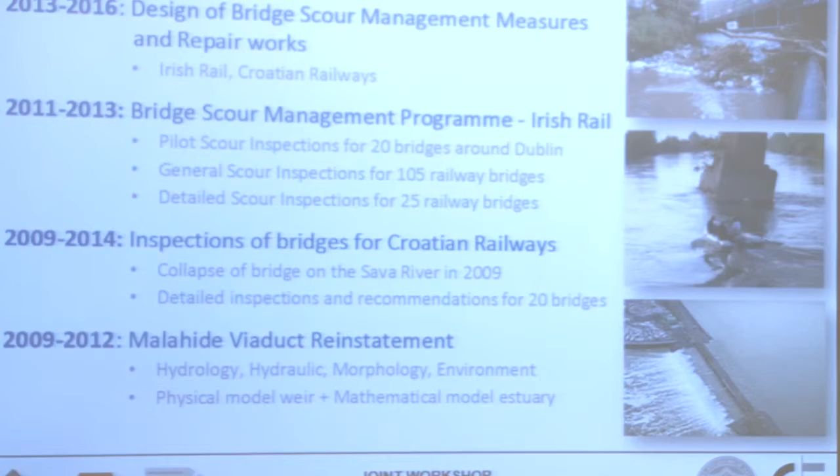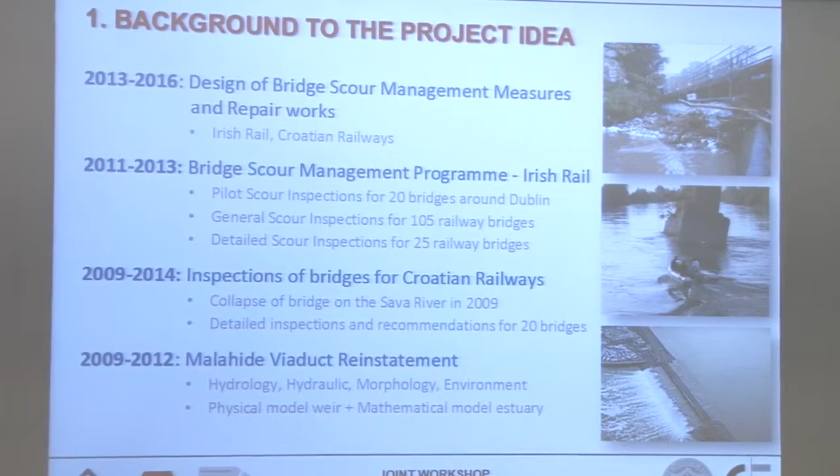I would start with the background of how the project idea evolved. As partners, we were actively involved in the rehabilitation of Malahide Viaduct, which collapsed in 2009. We analyzed past events and were involved in the investigation and design of that weir. We were also involved in assessing the causes of the failure of the Sava Bridge, which I wasn't able to join you for yesterday, but we were actively involved in that project as well.

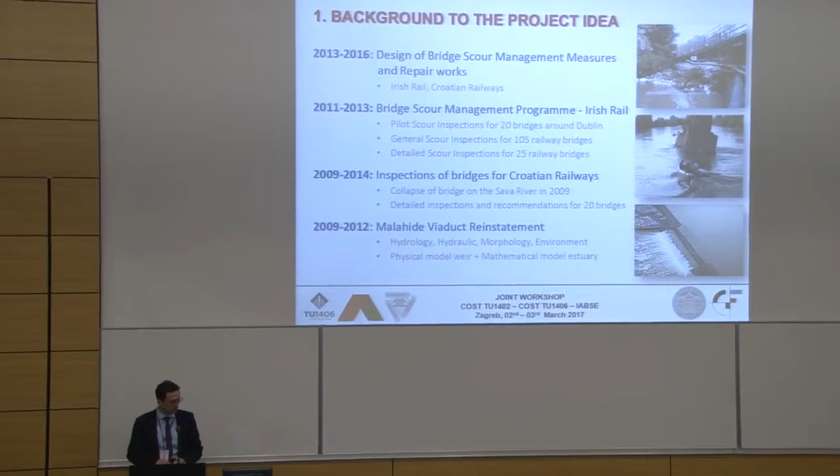Further to that, we were involved in assessing scour risk across Ireland for more than 100 bridges, and also in design studies of scour protection in Croatia and Ireland, etc.

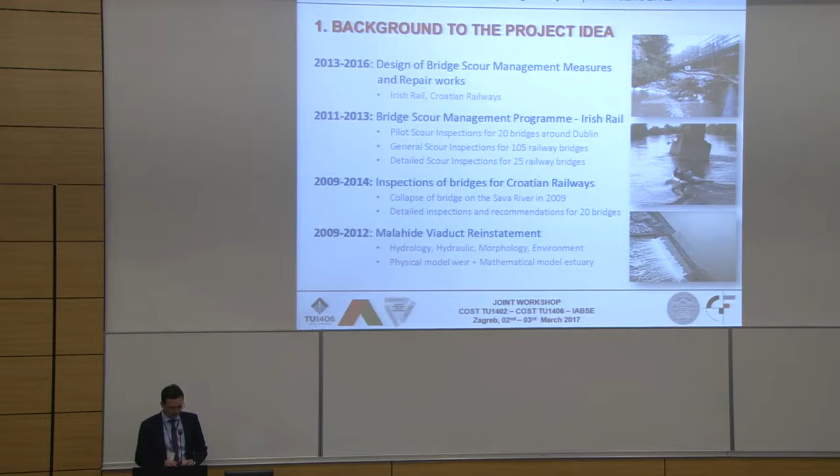As my previous presenter also pointed out, scour is a main cause of bridge failure. From a study in 2007, which is well known, if we look at the number of bridges and causes of bridge failure, we can see that 58% of failures are due to hydraulic effects, which is actually scour.

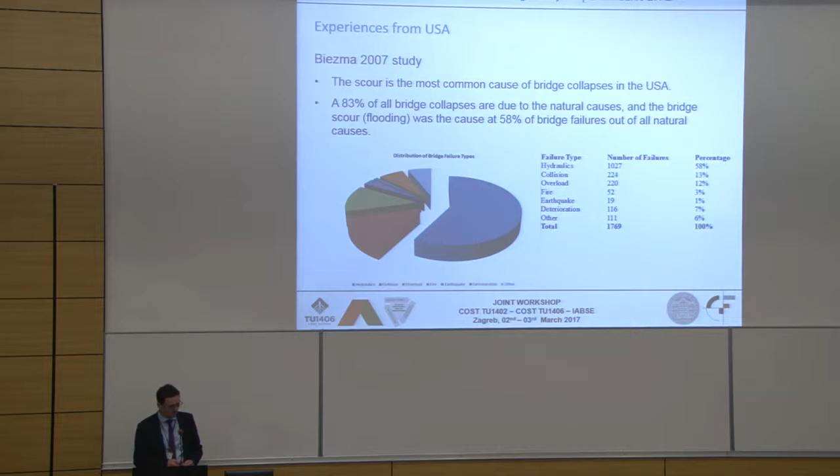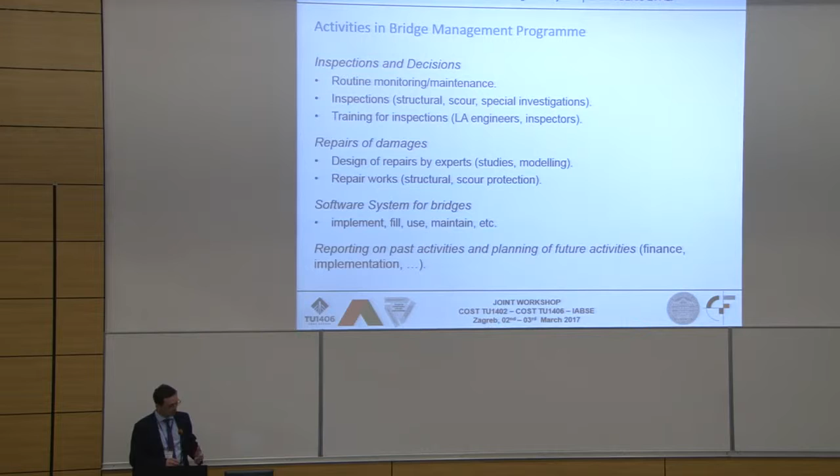When we looked at the entire process of how the activities of a bridge management system work for the end user, we need to consider inspections and decisions, meaning routine monitoring and inspections of bridges, and also training. Then there is repair of damages, either hydraulic or structural, and a software system which combines all the data. There's also reporting of past activities and assessment of future activities.

So from the end user point of view, there are always limited budgets and limited time available to collect and process all this data. Decisions must be made about how and where those limited resources should be invested, and where investment is not justified on the other hand.

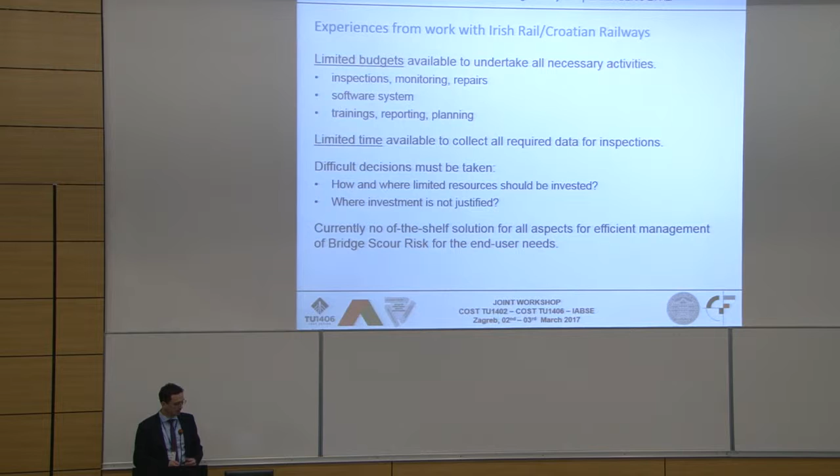When we looked at the various possibilities available on the market, we said, okay, we need to look at this from scratch, from the beginning. This is how the idea ended up with a cost-effective solution focused mainly on scour risk, which is what I'll point out today, but we broadened it up also to the structural aspect of bridge safety.

In general, Bridge SMS is an IAPP project under the FP7 IAPP program. Its duration is 4 years, from 2015 to 2018, and the budget is 1.4 million euros. The partners are two research institutions, University College Cork and the Faculty of Civil Engineering from Zagreb, two industry partners, Cork County Council from Ireland and Infrastructure Portugal, and a software company from Zagreb, Artis.

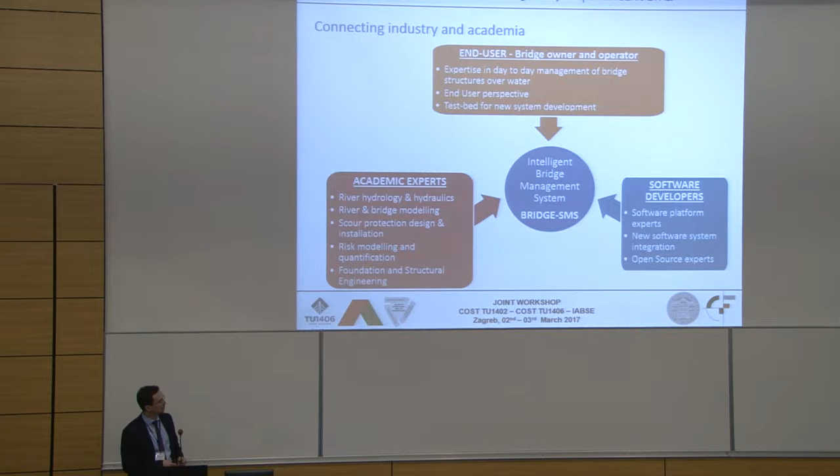We also have a supporting institution, University of Lincoln, and two institutions from Ireland. Looking at how this interconnects, from the entire project we have the end user perspective, so we get information on their needs, what their daily work is, and how they look at this inspection system, because they're not dealing only with bridges, but also roads and other infrastructure assets. Then we have academic expertise from universities, and software developers who help develop the entire system. All of this is jointly interconnected in the project.

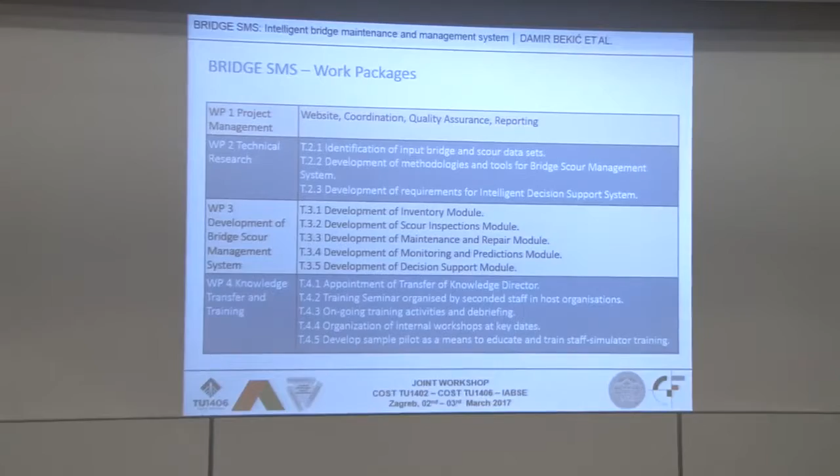If we quickly look at the work packages, the first is more general project management. What I'd like to point out today are a few elements of the technical research, which goes to identification of input bridge and scour data sets. The data is the most valuable thing, and how we process, collect, store, and use the data is one of the big elements of our idea and of this project.

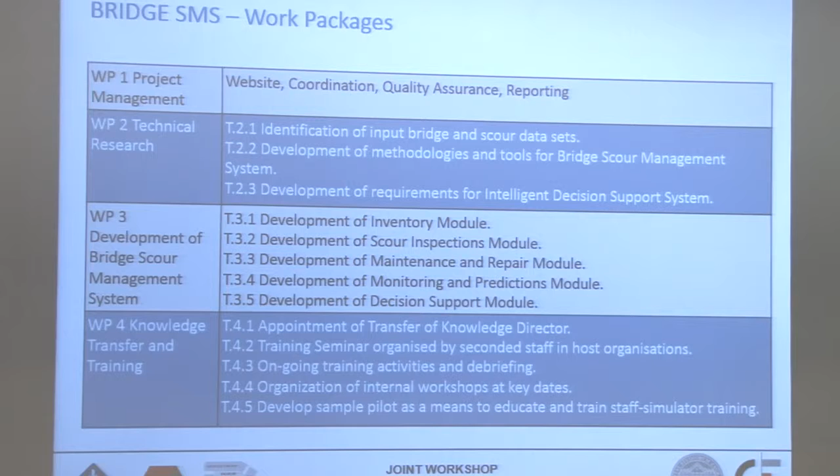Work package 3 is the development of different modules, so we are looking at developing this as a modular system. In the end, there is knowledge transfer and training involved in this project, because this is part of the Marie Curie Action.

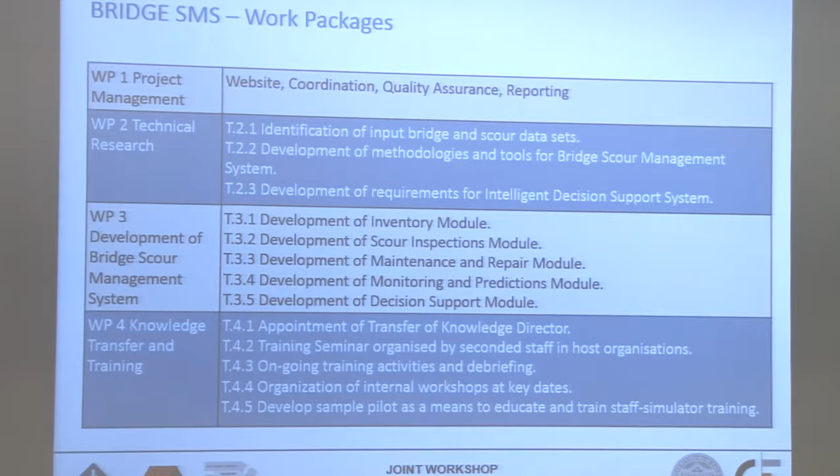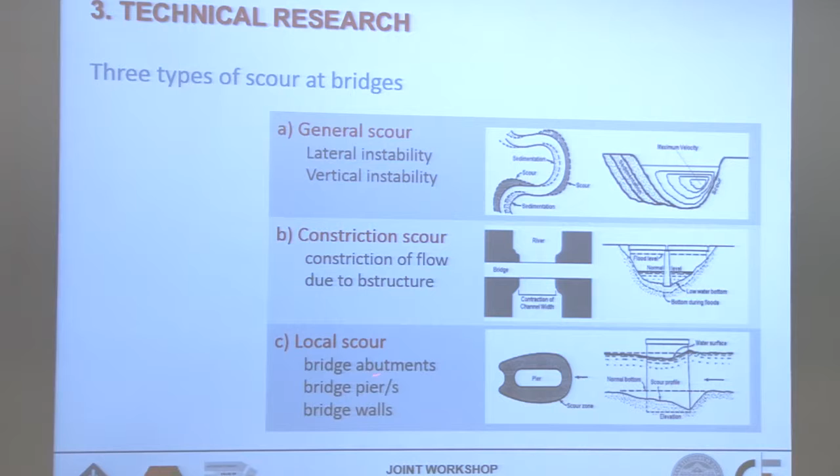Looking more generally at scour, there are 3 aspects that need to be addressed. The first is general scour, the morphological development of the river where there is no structure at all, so the river develops either horizontally or vertically. Then we have constriction scour, where a bridge structure constricts the flow, increases velocities, and produces problems to the bridge. And there is local scour due to abutments or piers, which deflects the flow and increases the potential for scour.

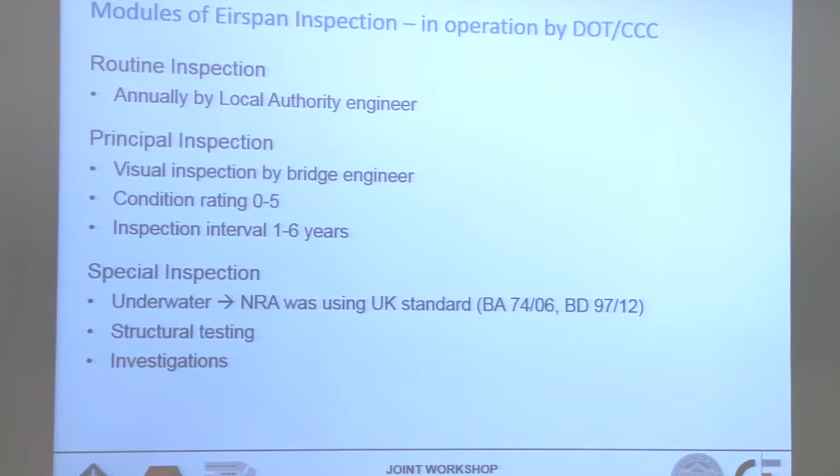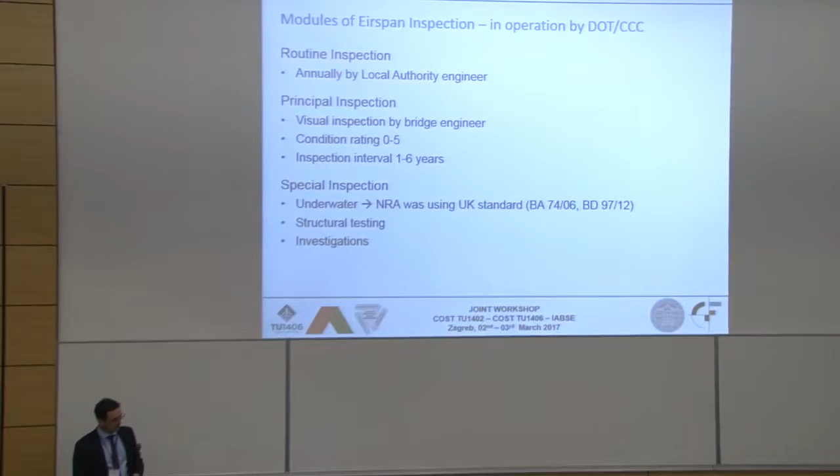Now looking at the end user, which is our Cork County Council in Ireland, they are using the Eirspan system, which is basically from Denmark. Probably some of you know this Eirspan system very deeply.

We have a routine inspection, done annually. Then there's a principal inspection, done either once a year or every six years. It gives a condition rating, usually done by visual inspection of a bridge engineer. This principal inspection actually has only one component for scour, which is the condition of a riverbed. So if we look at general scour, constriction scour, and local scour, there is only one component that looks at all three aspects.

Where is scour risk addressed? It's addressed by the National Road Authority in Ireland, which is using UK standards, BA 74/06, or now the BD standard, to assess scour risk.

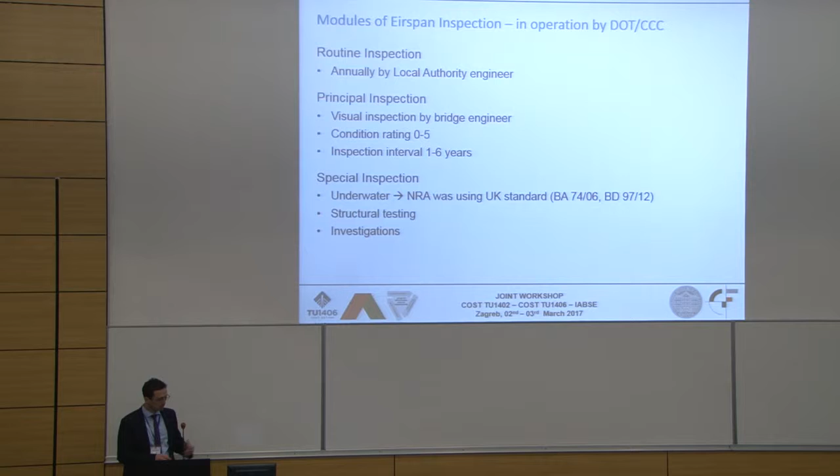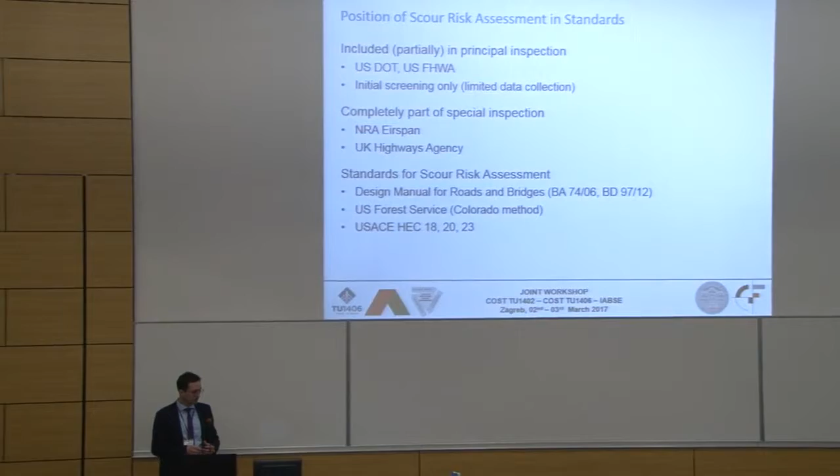So in the principal inspection, only one component looks at scour risk in this existing system. When we looked at other systems, from the US Department of Transport for instance, scour risk is included in the principal inspection, but only partially, not fully covering all aspects of general, constriction, and local scour. Sometimes, as we've seen, the NRA system uses a completely special inspection to investigate scour risk.

So to assess scour risk, there are different standards to include it in the entire bridge management system, either using UK or US standards, and I would like to show you some results of using those.

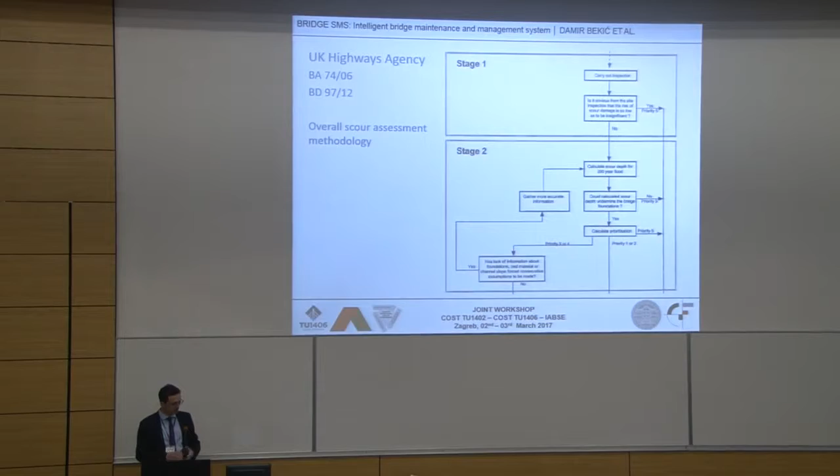So my presentation is mainly pointing here on scour risk and not the whole aspect, because there is limited time to present all the aspects.

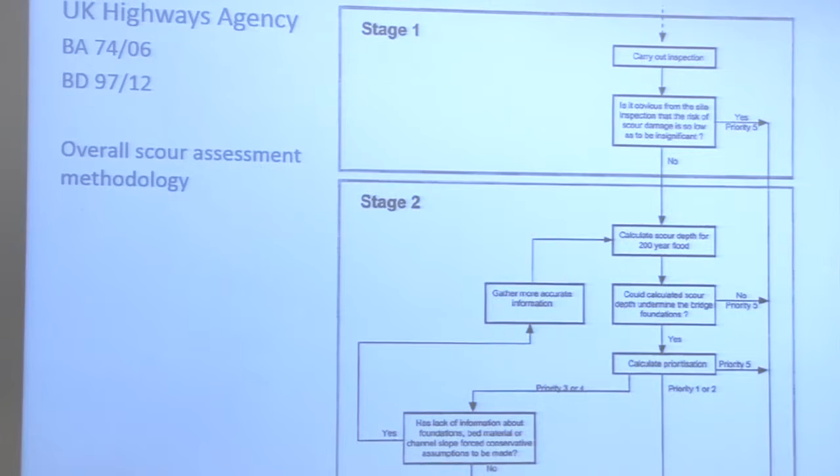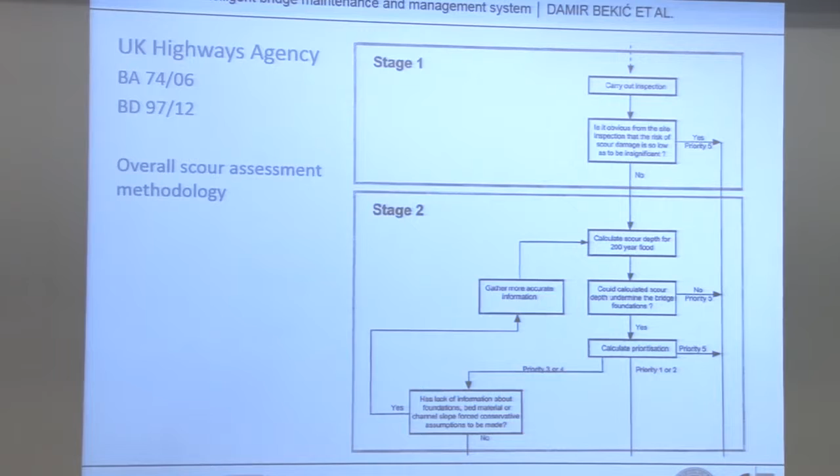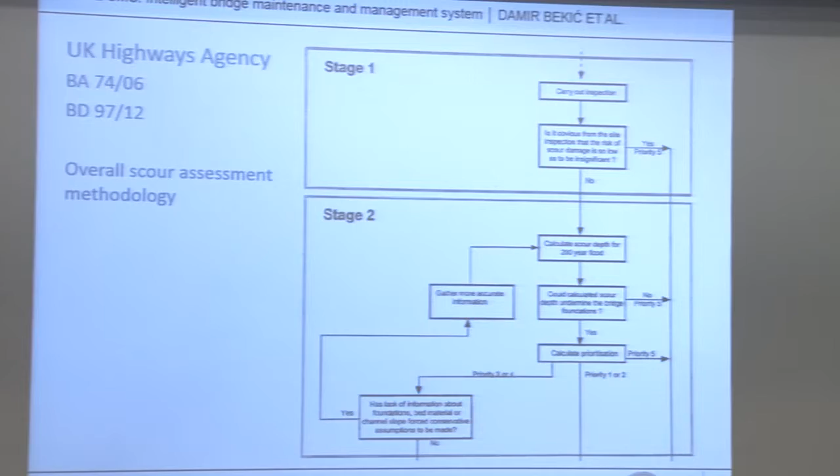If we look at this BA 74/06 standard, there are two stages for assessing scour risk. The first stage gives just one simple answer: is it obvious from the site inspection that the risk of scour damage is so low that it can be neglected? If yes, then we have a condition rating or priority rating of 5, and the inspection is over. This is a very simplified approach to these three aspects of general, constriction, and local scour. If it's not negligible, then you go to stage 2.

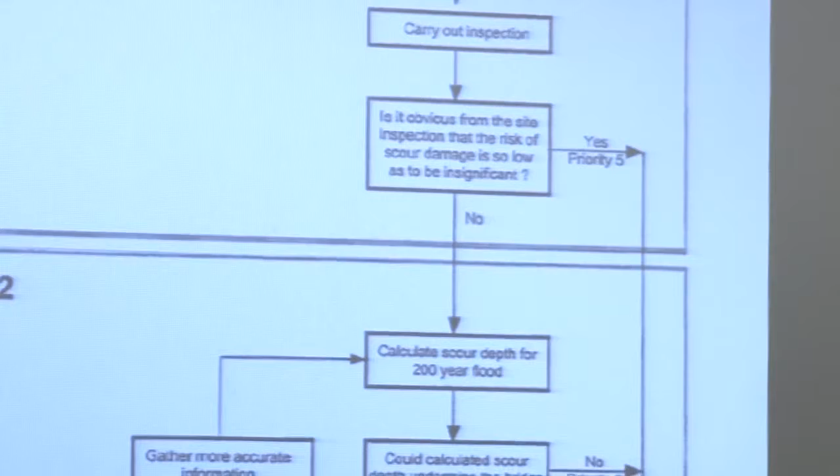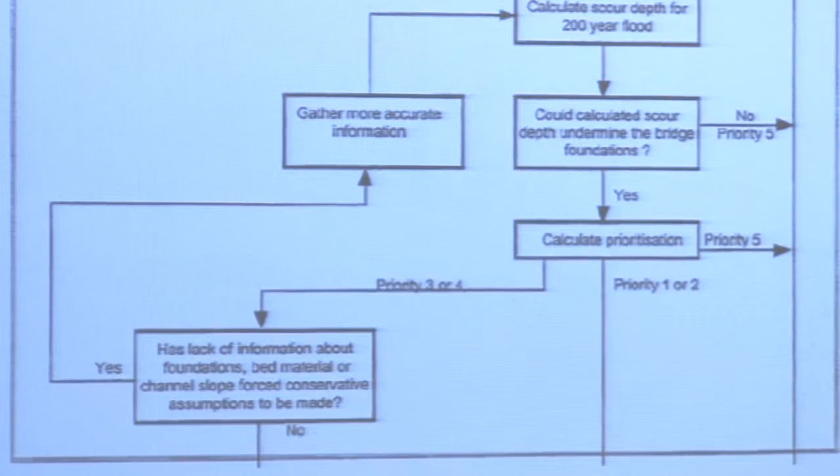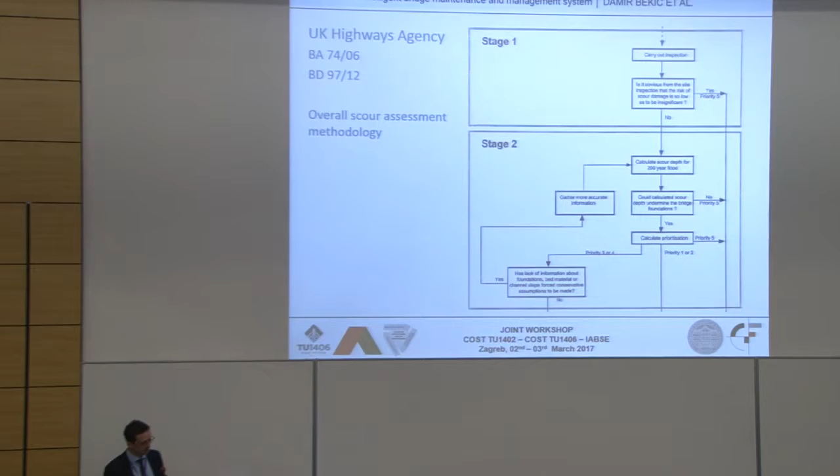Then you need to calculate a 200-year flood, and you need information on the foundation depth. You compare your expected scour depth with your foundation depth, and if your calculation is correct, you prioritize your bridges, usually to a rating of 5. But if you don't have information on foundation depth, then you need to go back and actually investigate the foundation depth.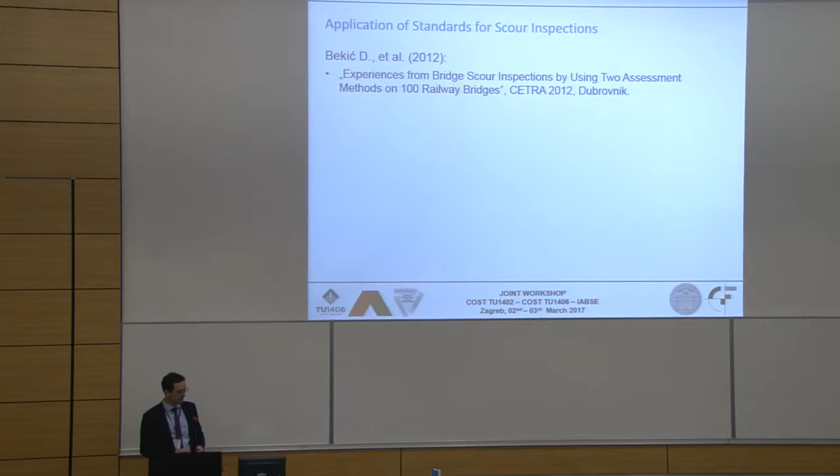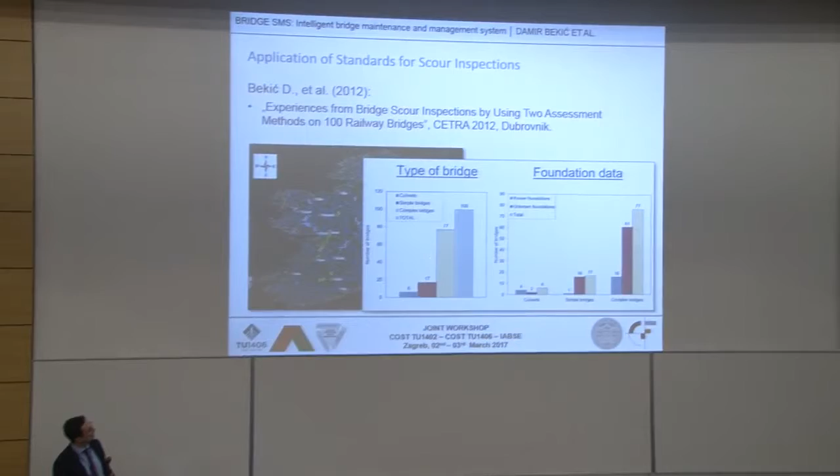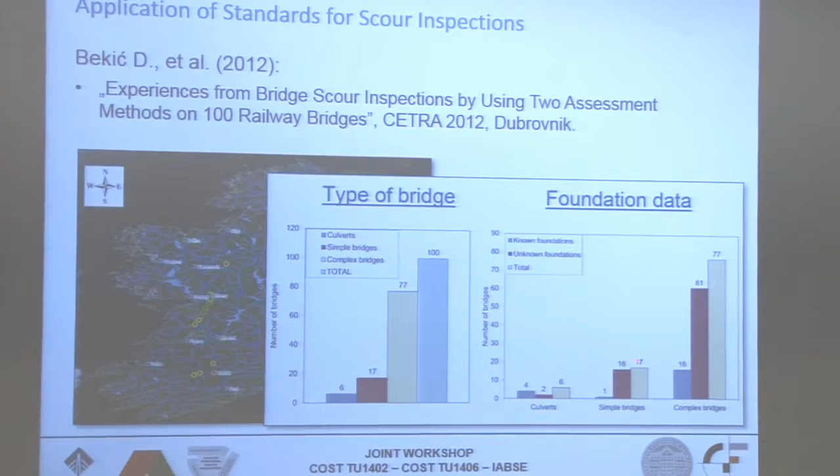From past work, which we also published out of these inspections from Ireland, we've seen that from 100 bridges across Ireland, looking at different types—culverts, simple bridges, and complex bridges—and only at foundation data, for simple bridges there are 16 unknown foundations out of 17, and 61 unknown foundation bridges out of 77. So there is a large percentage of bridges without this information.

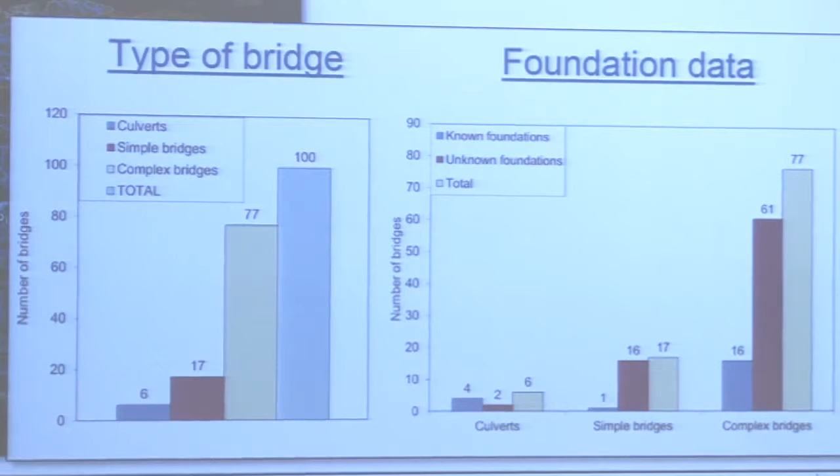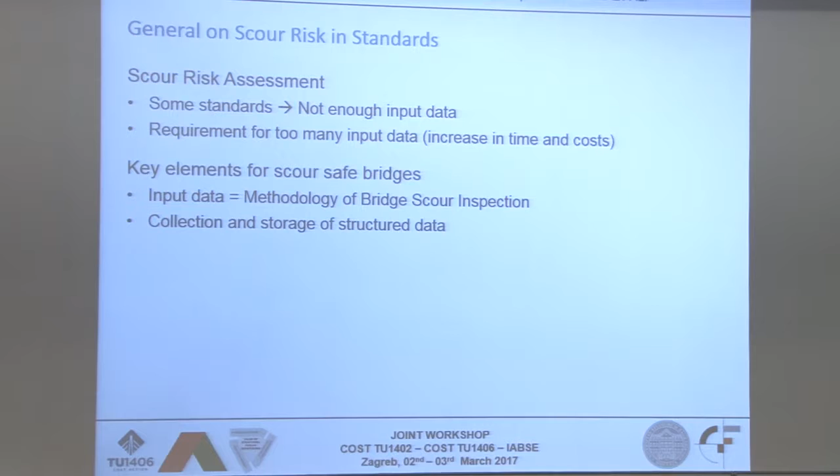So the question is, how do you assess scour risk with standards that require that information? We've seen that some standards don't give enough input data to assess the three aspects of scour risk, while others require too much input data. Input data is the key aspect of bridge scour inspection—what information you require and how you gain that information is one of the key aspects of this project.

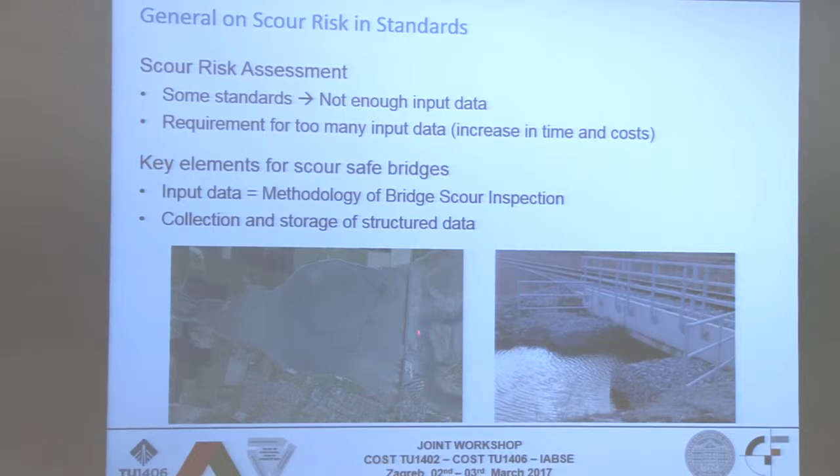We also looked at different types of structures. For instance, this manifest diagram shows one key aspect of scour risk: constriction scour. The width of the upstream estuary of the bridge is 3 kilometers, decreasing to 174 meters, giving significant constriction—which is why we see increased velocities at Malahide.

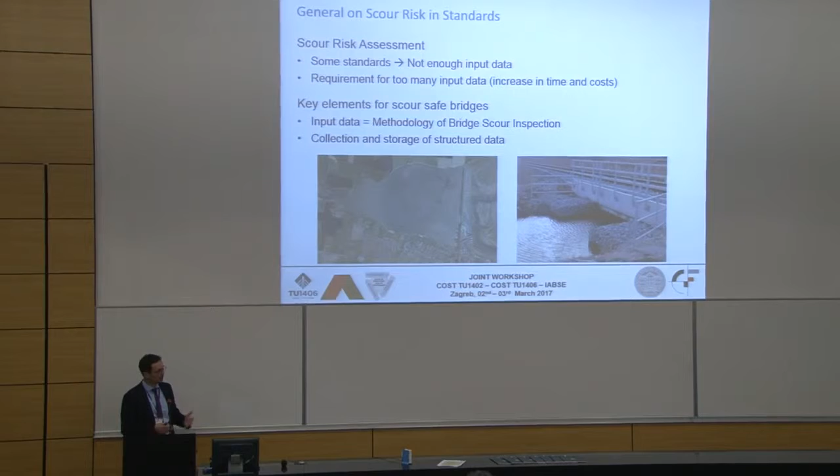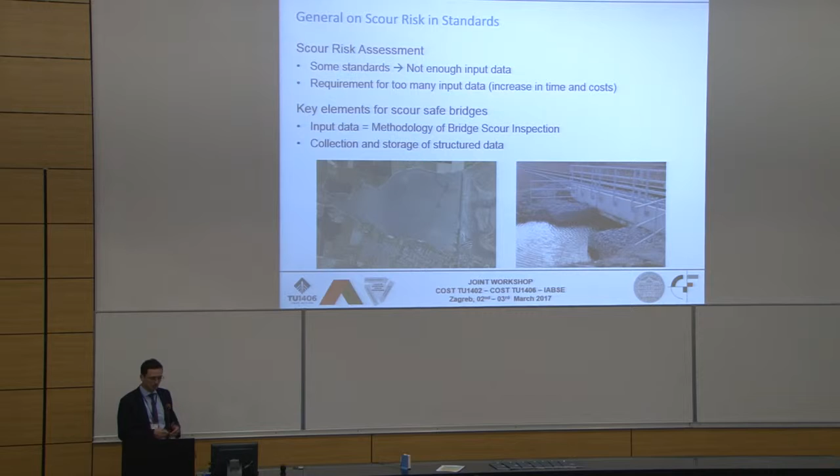For this complex system, having the same input data and elements as for a simple new culvert structure doesn't seem to be cost effective. So we've seen how different input data is needed for different structures as well.

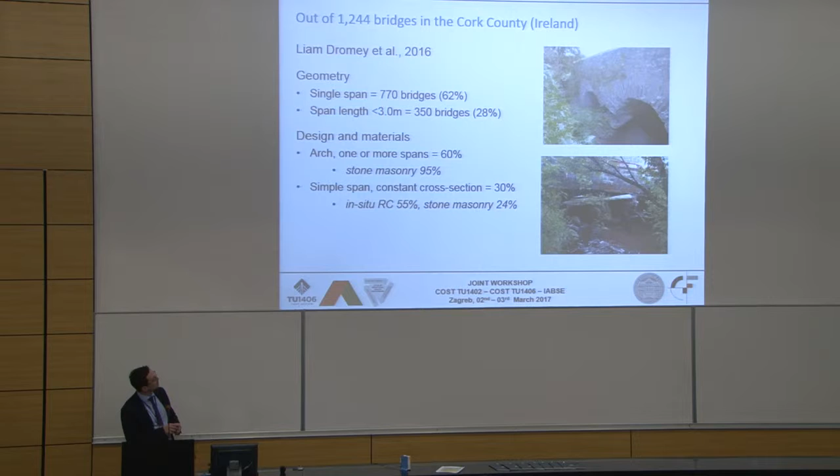Looking at the end user point of view, our pilot case is located in Ireland in Cork County, the largest county in Ireland. Out of 1,200 bridges in Ireland, in Cork County single-span bridges account for about 62%, and those with spans less than 3 meters make up 28%. So we're looking at a large number of bridges with simple geometry and spans less than 3 meters.

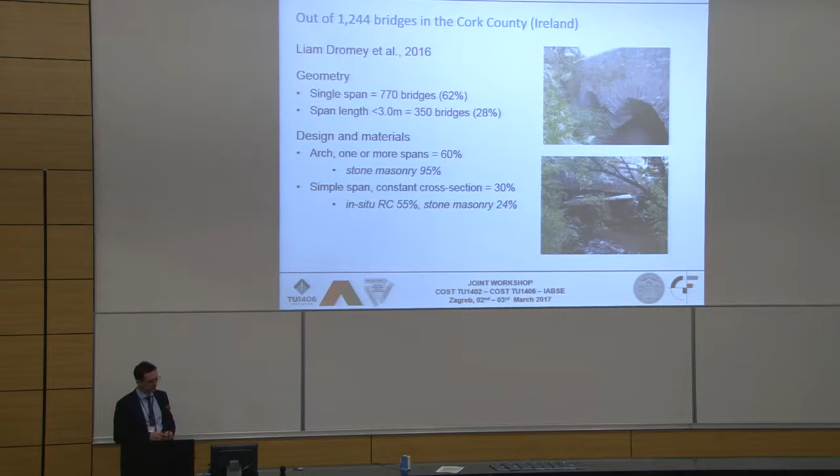In terms of structure, the main material is stone masonry—95% of those bridges are masonry. Having that information from an end user point of view and past experience, we developed the first draft of the guidelines for both structural and scour inspection of bridges.

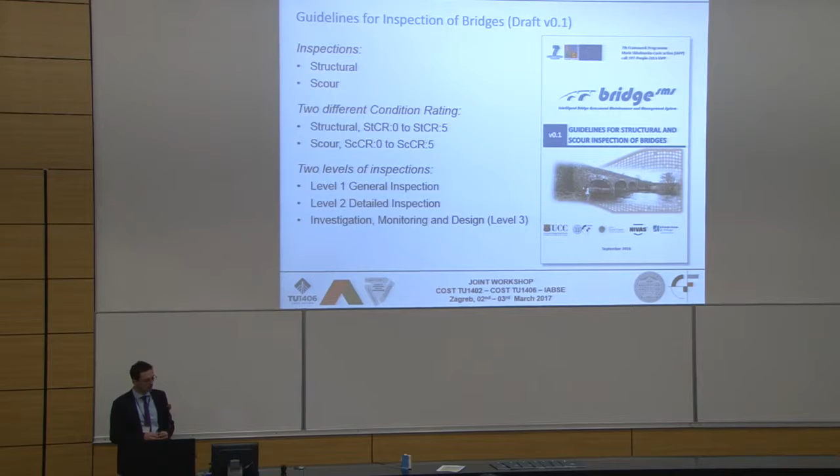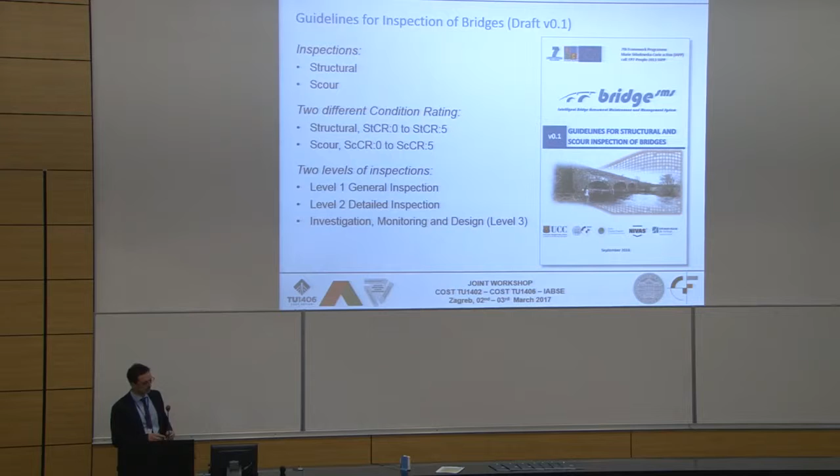We looked at two aspects, structural and scour, and developed them into three levels. Level 1 is the inspection of simple bridges. Level 2 is for complex bridges with complex geometries and complex flow conditions. Level 3 is special investigations for certain bridges.

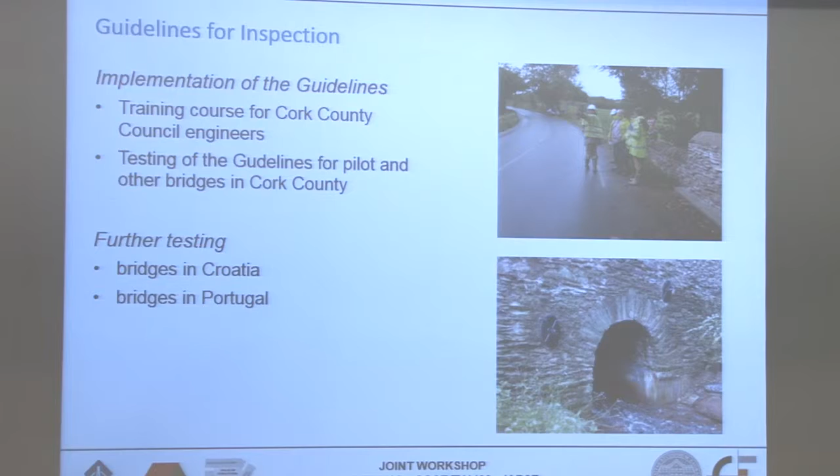We started implementing those guidelines. We had training for the end user, and we will also test it not only on bridges in Ireland, but also in Croatia and Portugal.

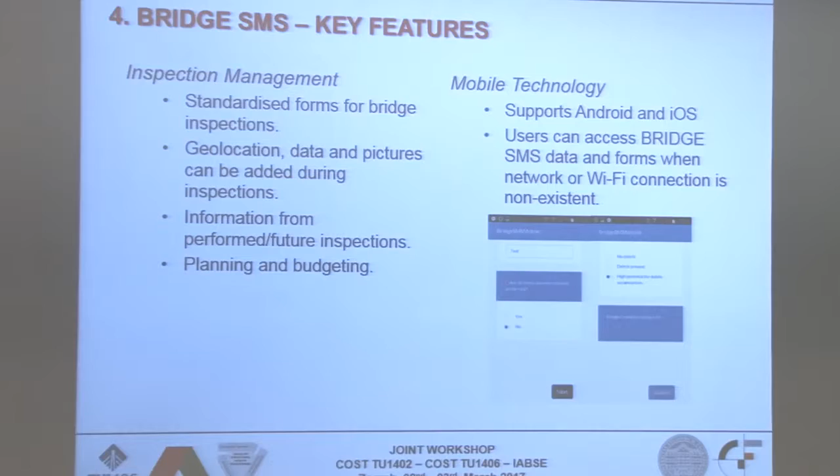But it's not only inspection we're looking at in this project—as I said, we're looking at a wider aspect. Since this workshop is on the value of information, I'd like to show you some features related to the information side.

It will be a modular system, and our inspection management will be one of the modules. All the data will be gathered in a structured way and stored in a database. From the end user point of view, we're developing a mobile platform to inspect the bridge on site and upload it immediately from the tablet to the website. For complex bridges, there will also be requirements for a desktop study.

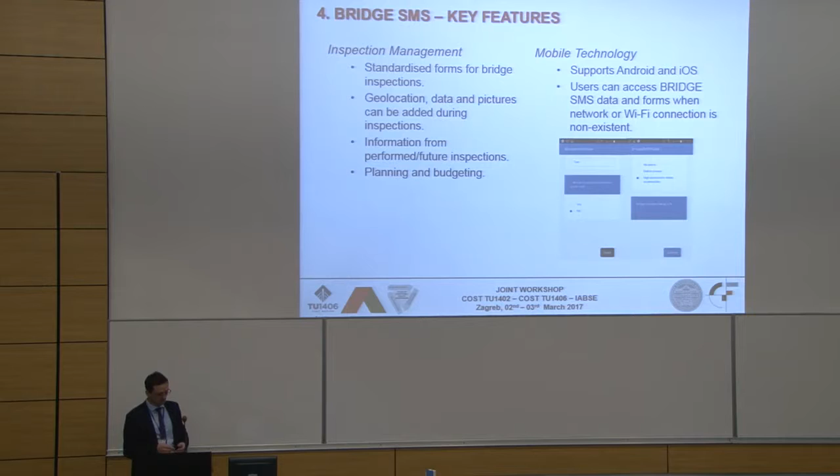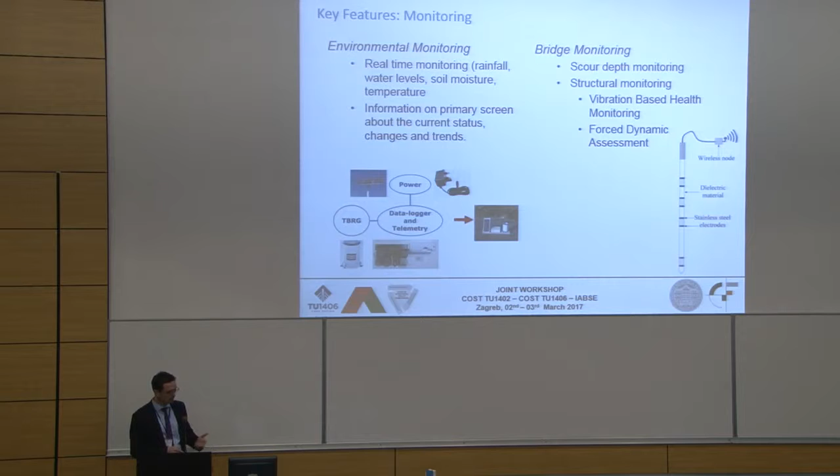Some other aspects are environmental and bridge monitoring. We are developing a new system that will be cost-effective for monitoring rainfall, temperature, and humidity of the catchment, in order to predict floods.

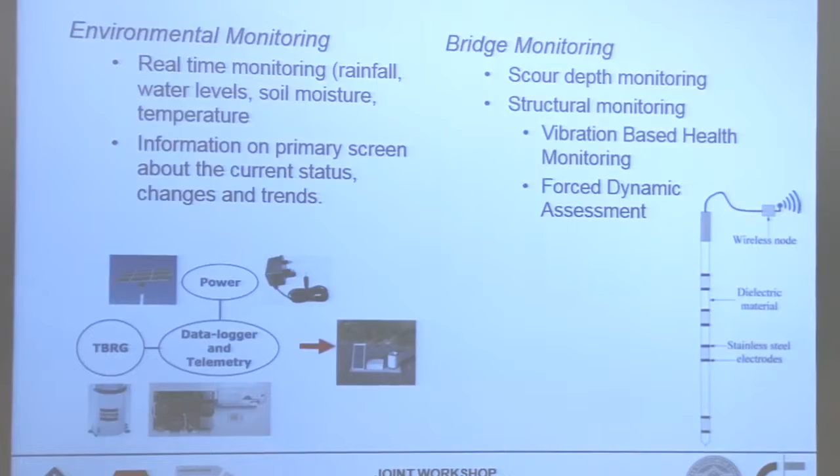We will also look at monitoring of the structure and scour at the bridges, again aiming for a cost-effective solution. In terms of flood management, we've become a partner of EFAS, the European Flood Awareness System, which will help us predict flood conditions at our pilot bridges.

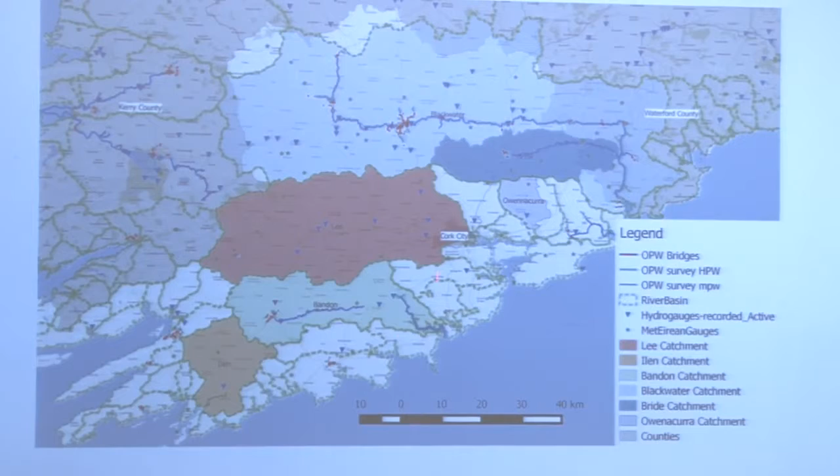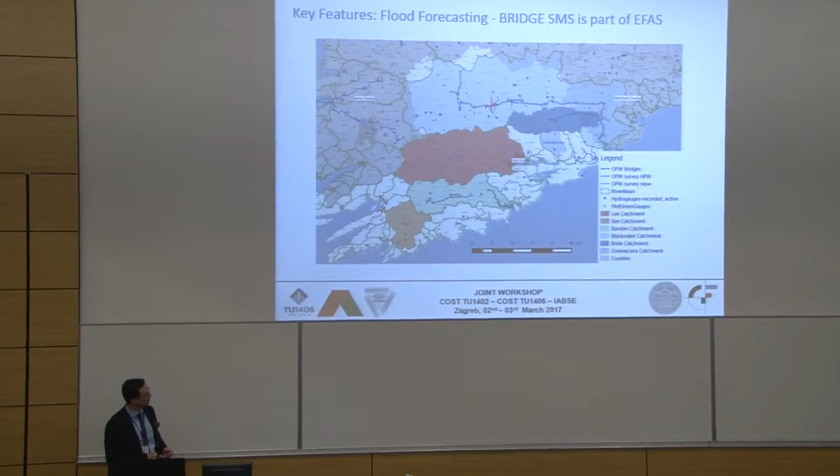I'd like to end by showing you our pilot catchment—this is the Bandon River and Bandon catchment. So far we've identified 6 pilot bridges, but we are looking to include even more towards the end of the project.

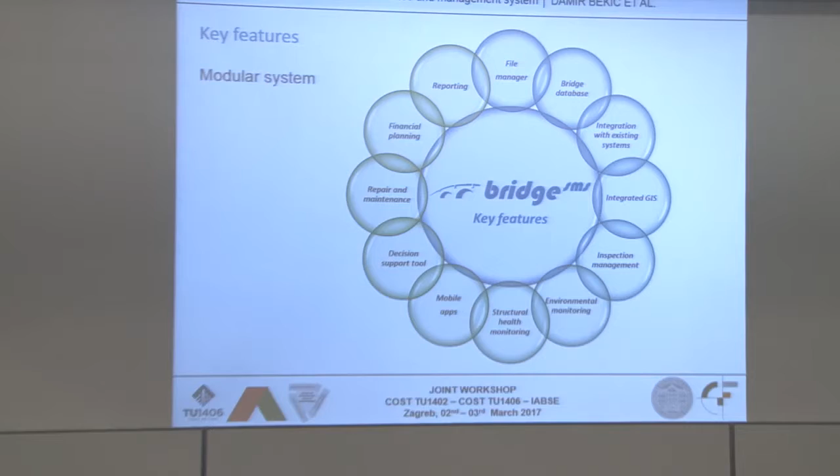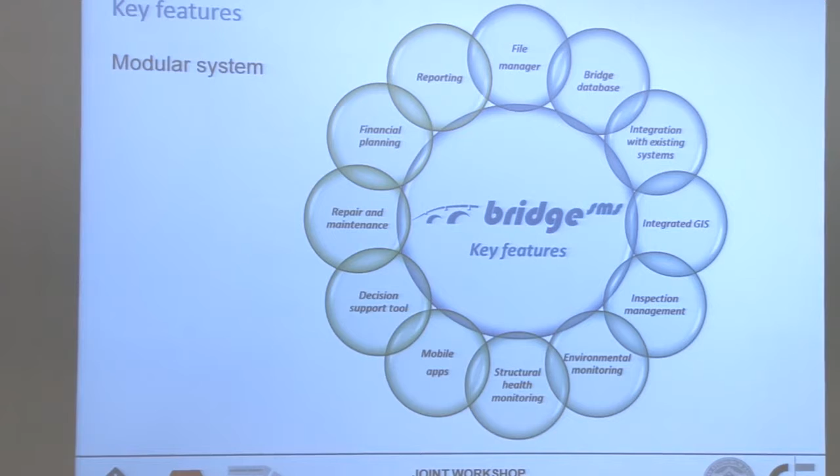This is the overall view of the bridge system's aspects. I won't read through all of it, but as you can see it's a modular system—for certain bridges we can use all the modules, but for simple bridges and simple cases we can simplify. We will have an integrated GIS system, a decision support system, and all required aspects including financial planning for future works.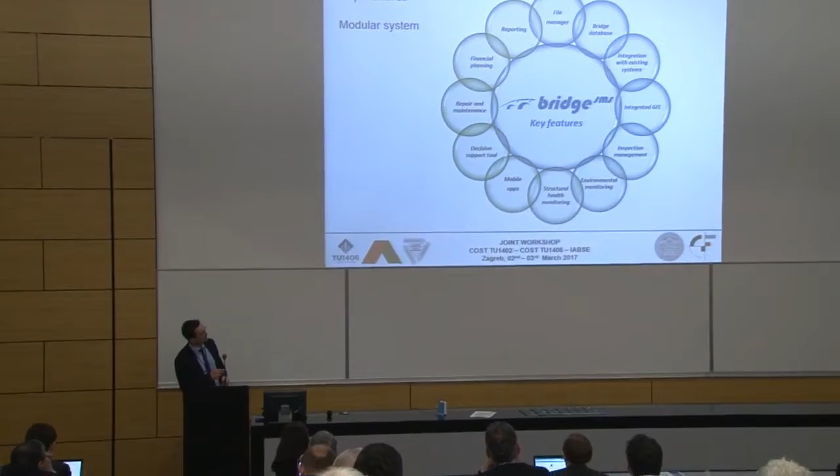To conclude this presentation, we are looking at the various aspects of bridge inspection from beginning to end, and we are trying to make it as cost-effective a solution as possible.

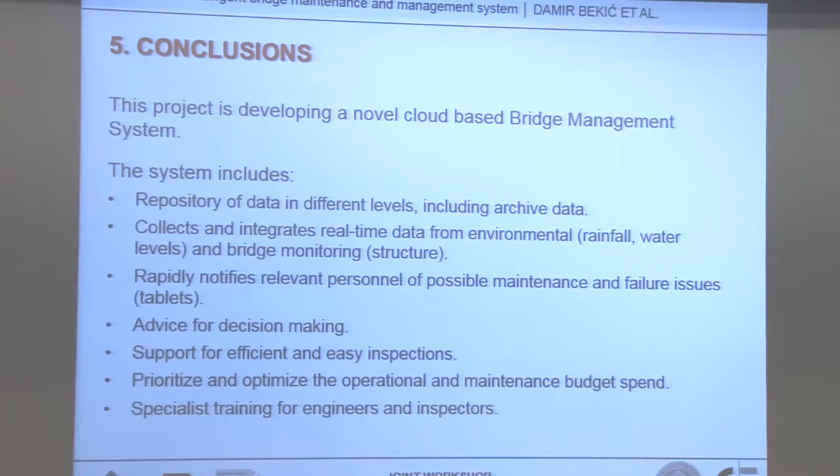We're looking at how to store the data, how data is collected and processed in real time, and how to use that data to rapidly notify personnel if certain elements become critical, especially in terms of flood predictions.

We will also have a decision-making tool from the end-user point of view, to support efficient and easy inspection—this is one of the key elements of the project. It will also help prioritize operation and maintenance budgets for future works for the end user. This is also included in the project.

It's also a training of engineers and inspectors, because we see that scour risk is not deeply understood by end users—the managers of the bridges—and how their knowledge of scour risk has developed in the past.

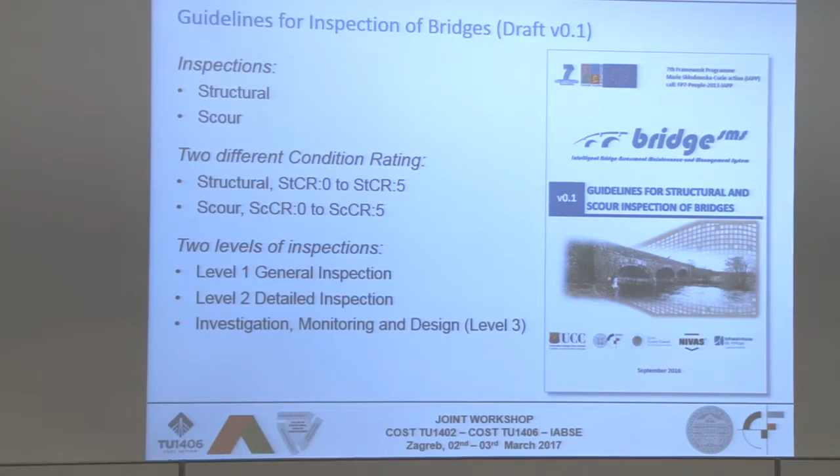If I can have just one more minute on that - this level 1 general inspection, the idea is, and what we've seen in the Cork County Council, they outsource their inspections completely. It's done by consultancy companies. It's not the same situation with Infrastructure Portugal - they do everything internally by themselves. So we asked the Cork County Council, would you be in favor of having inspections done by your own engineers? Because that will keep the knowledge inside the company, and they'll be able to assess by themselves. They were in favor of that, especially for simple bridges.

So that's why we split the bridges between level 1 and level 2 inspections, and we are giving them a tool to inspect all level 1 bridges, which are mainly simple bridges with a single span. So this is the basic. Of course, it can be outsourced as well for level 1 inspection, but this is also our idea. Okay, thank you very much, we can continue the discussion later. Thank you.

Any more questions from the audience? Okay.

I think scour is a very interesting problem, and I would only like to challenge you, Damir, to give support at working group 3 in the task coordinated by Nico, because I think it's interesting to have more discussion about this issue.